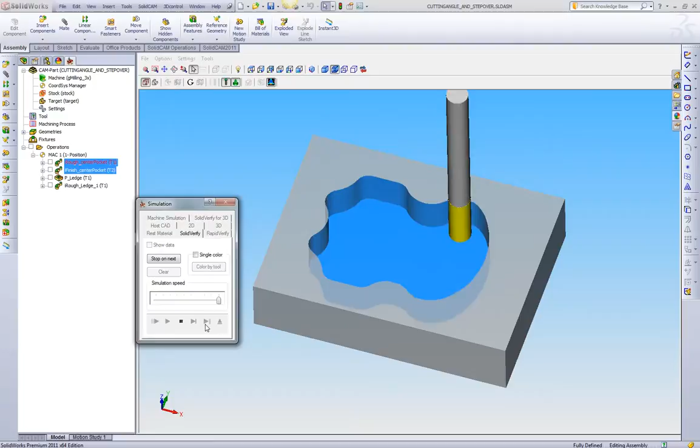To show what the stock looks like before this cut, we'll go to our Solid Verify and play this. Here we have just an iMachining roughing toolpath, and then we also have a finishing toolpath to make sure it's the exact geometry. If we show our target, what we can see is we have this center pocket finished, now ready to machine this ledge.

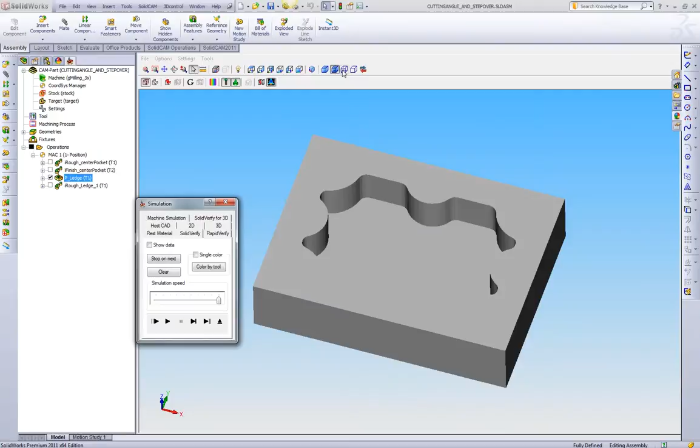We have a standard pocketing toolpath set up here. As we can see, we have our 4 offset passes to machine that ledge. Let's go into the Solid Verify, and we're going to take a look at what happens. We're going to go to a top view, and we're going to also switch on wireframe so we can see how the tool is cutting.

Here we have the tool entering into the first corner. So there's a few things we want to show here and measure. We're going to use a screen capture utility called Jing that I like to use. It's going to allow us to draw some arrows on this. Now what we have here is we have a few things going on. We have the toolpath, and we have what the tool is doing along this toolpath.

We're going to draw an arrow for the cut direction. Here we have the tool moving in this direction. We can change this color to blue if we like. And we're going to label this as cutting direction.

Now, when we look at step over, or really what we're looking at is width of cut, we want to measure width of cut based on the cutting direction. So we're going to draw 2 arrows on where the tool is touching at the first point, here, and where it's touching here. We always want to be measuring with the cutting direction.

Now what we see here is this width of cut that this tool is actually taking in the corner, we can see is actually 3 to 4 times larger than the width of cut on straight lines. Generally, when we think of step over or width of cut, we are generally thinking in terms of straight lines. But what happens when you look at the tool changing direction, turning corners, going into concave areas, the direction of the tool is changing, and it's not just cutting a straight line.

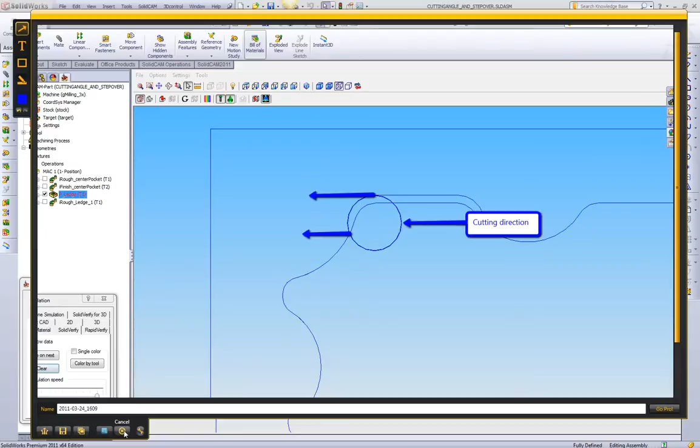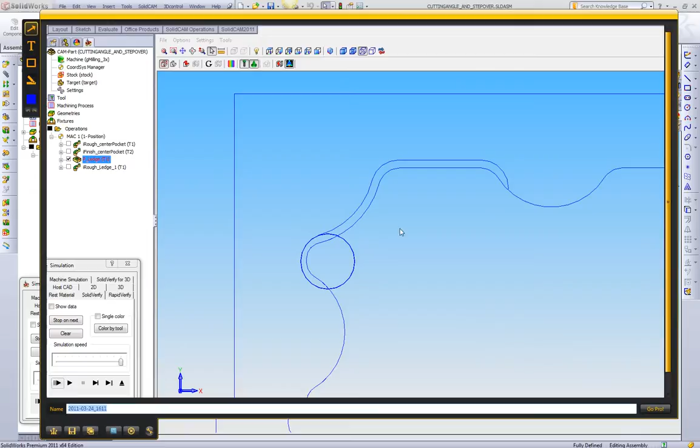Now we have our next motion. Here we did a circle coming around into this little corner. We're going to do the same thing with Jing, and we want to measure what the cutting direction is and what our width of cut is. Now since we're doing a corner, the end result is the cutting direction is generally looking something about like this at the end of the corner.

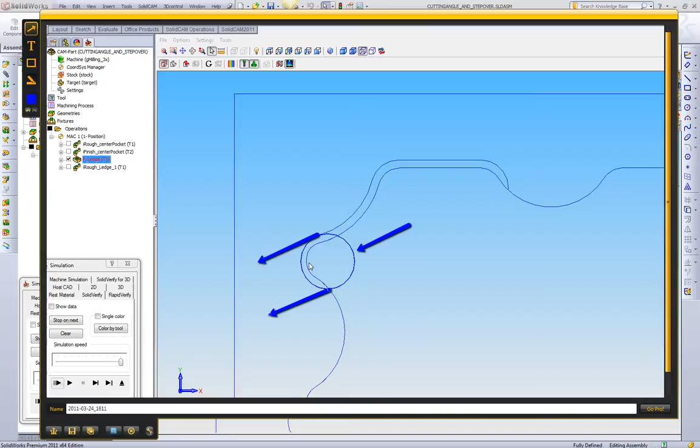So now if we measure our width of cut, once again going parallel with our cut direction, here we can see the width of cut versus our straight line is something maybe 6-7 times the width of this. So here is where we have all of this tool overloading with standard parallel style toolpaths with our standard step over.

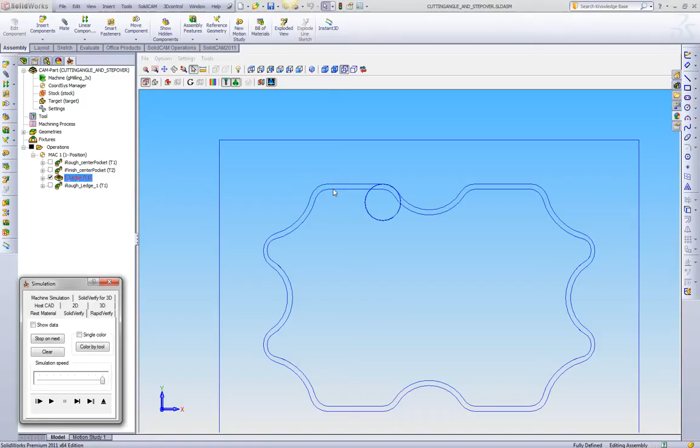We'll just play through the rest of the toolpath to show you what you get. Now visually what we see is we have a constant width of cut just looking at this with our eye. But in reality, as we just saw, the cutting direction is not a straight line, so the material that the tool is actually removing is not constant by any means. So now let's go take a look and see what iMachining gives us here.

We're going to take that pocketing toolpath and just drag it below it. We're going to go back to our Solid Verify. We're going to repeat the exact same steps. We'll zoom in on this corner, we set it to our top view, and we also go to wireframe. And we're going to single step through iMachining.

Now the first thing we see here is that iMachining is gently entering into the material. Once we hit here, we can see we're now at our width of cut, or the controlled step over we have.

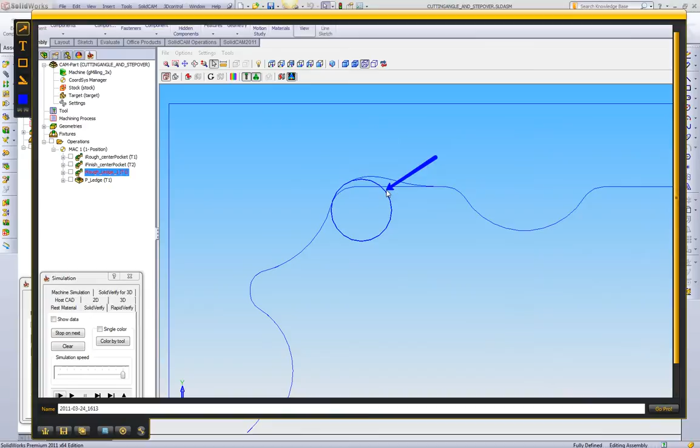We can see as we're coming into this corner now, iMachining is starting to roll the tool in this direction, and we can see our width of cut changing. Let's use Jing again and draw our arrows. Since we're turning this corner, we basically have the tool coming at a direction roughly like this. We'll label this cutting direction.

We're going to draw our arrows again. Now what we can see here is this width of cut, based on cutting direction, is now the same as the straight line width of cut.

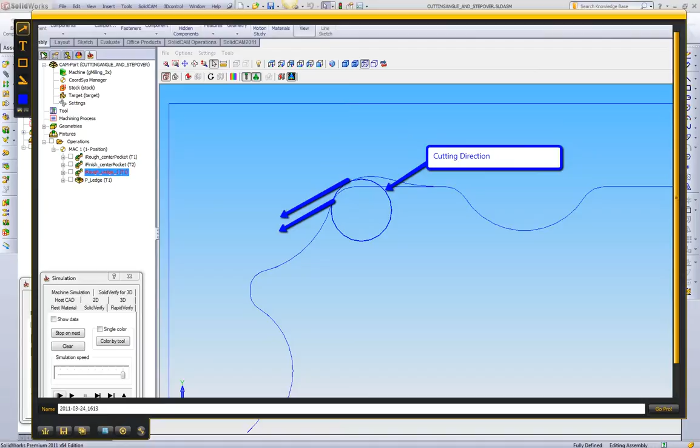Which brings us to our definition of controlled step over. We'll type this out so it's very clear for everybody. Controlled step over is: it is to constantly adjust step over to give a constant width of cut based on cutting direction.

This is very important to think of. We all know what step over is, but generally we're only thinking of step over in straight lines. iMachining is using controlled step over, where we're actually adjusting the step over to give a constant width of cut.

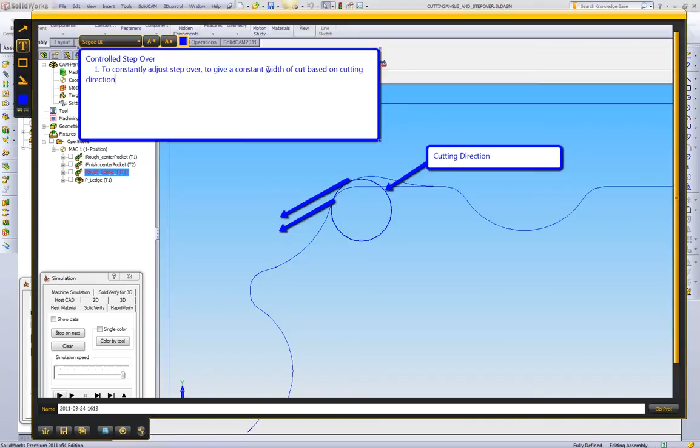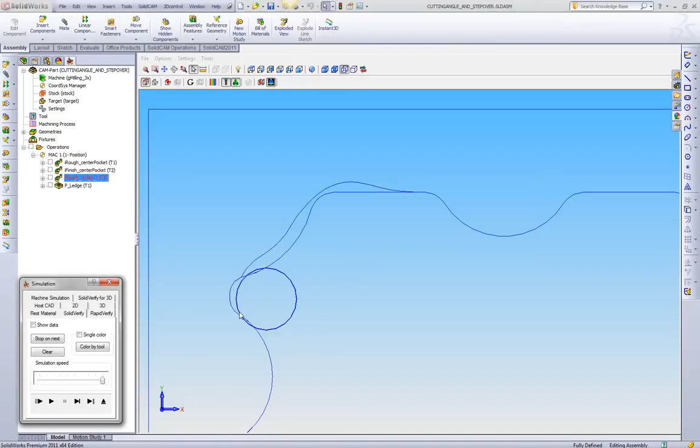We're going to continue playing through this a little bit. Here we see an interesting thing that happens. As iMachining was trying to cut this corner, there was no way for it to hold the width of cut or step over that we defined, so the tool actually had to back away and could not get into this corner, because it was impossible to give the user the controlled step over it wanted based on entering into this corner.

Then we'll play through one loop. So there we have one loop. Now here we see the very big difference to the standard parallel offset toolpath. Looking at this, it appears as if we'd have a varying width of cut or a varying step over, because we see different amounts of material being removed.

But in reality, when we measure the width of cut based on tool direction to give a constant load on the end mill, because we're mostly concerned about what the end mill is doing when it's removing material, not what the toolpath looks like in the CAM software, we see this varying step over along the entire part. You can see it getting to the thickest points when it's at the straight lines.

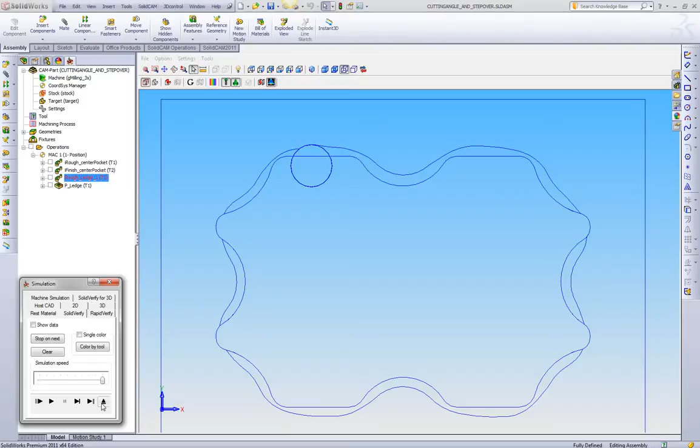What we can do is switch to an isometric view and just finish playing out this toolpath so we can see iMachining finish. What iMachining does is it continues to progressively shave away the material in a constant spiral motion with our morphing spirals. Then at the end it goes through and cleans out all the corners to remove that material.

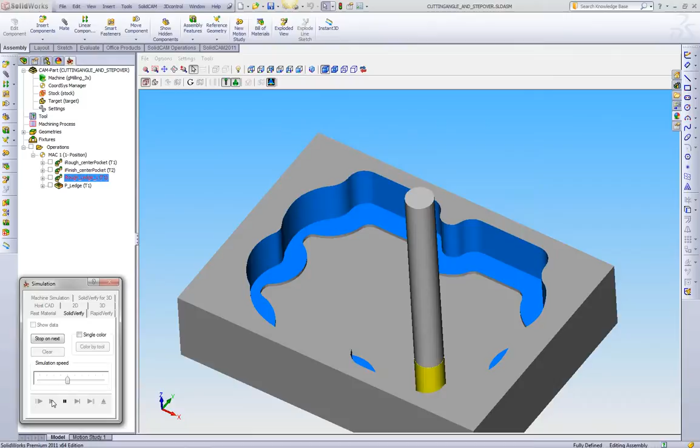We'll also take a quick look at the toolpath again. So here we have our standard pocketing step over, and here we have our iMachining toolpath, where we can see it's actually varying.

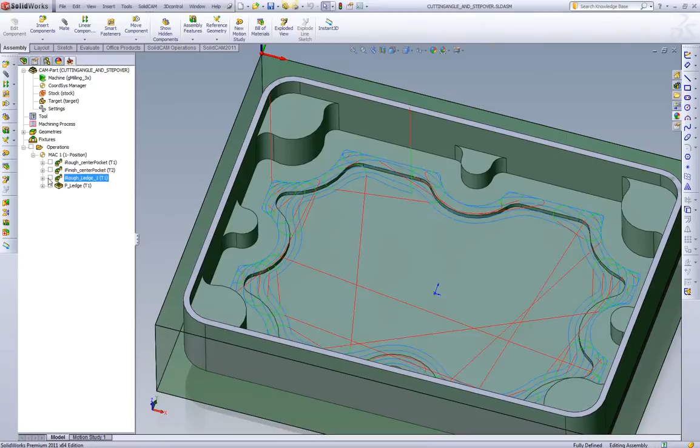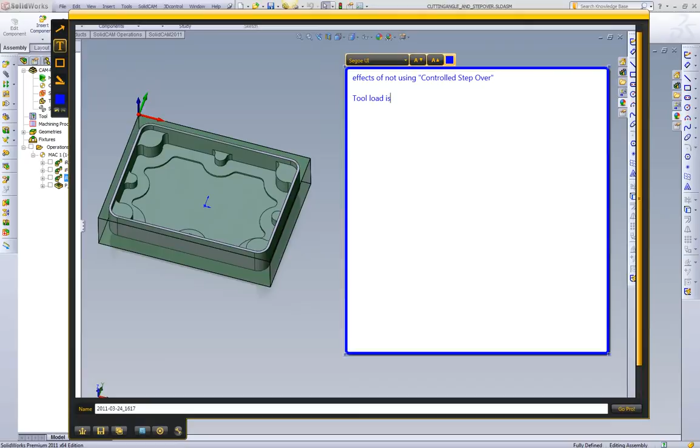Now what we want to do is review what this actually does for us. Once again we're going to use Jing. So what are the effects of not using controlled step over in your CAM software? The easiest thing to look at is the tool load is increased in the corners, i.e. non-straight line cuts.

What this is going to lead to is tool wear and fatigue. It's going to lead to broken tools. It's going to lead to multiple depths of cut.

And when we pick multiple depths of cut, what this is going to do is wear the lower portion of the tool's flute. So for instance, if we had a tool with a 1-inch flute length, generally we might only be cutting with a depth of cut of 100 thou. So what this means is we had a 1-inch flute length, but we only cut with 100 thousandths. That means we never get to use the other 900 thousandths worth of flute length.

This is what leads to premature tool wear before the tool's actually finished machining. I think a lot of us are familiar with retipping end mills, where we grind off the bottom of the end mill and then retip it, because the upper portion of the flute is generally still good.

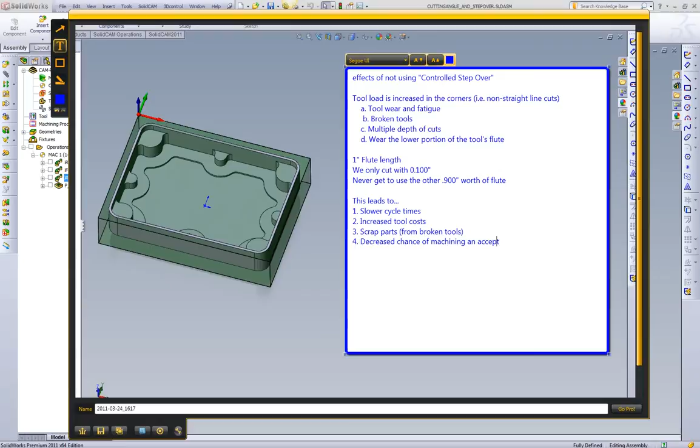Now the end result is this leads to slower cycle times, higher quoting costs from that. We have increased tool costs. We have scrap parts from broken tools. And we also have a decreased chance of machining an acceptable first run part.